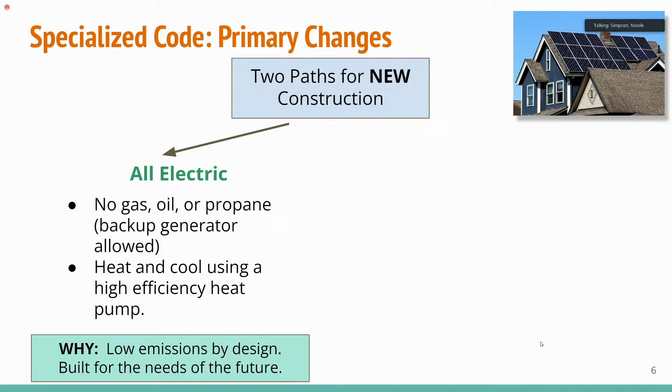But the most important thing is the heating and cooling with a high efficiency heat pump. We can talk more about heat pumps later if you have any questions about that. So why go this path? This means lower emissions by design. If you're all electric, it is inherently lower emissions. And it's building for the needs of the future, not aligned with the way things have been done in the past. So that's a valid option today, but the alternative is mixed fuel.

That's the terminology used for any kind of fossil fuel hookup into the building. There's two requirements that will come with that for a specialized code. Pre-wiring for future electrification. That means air and water heating, cooking, and clothes drying. If you're using gas for that, then you would need the wiring in place to be able to easily switch that to electric when any of those systems fail and you replace it. It makes it easier for that future building owner to make that choice to switch to electric. And you think about where we'll be 10, 15, 20 years from now when they'd be making that choice, it's going to be much more common and the obvious choice at that point.

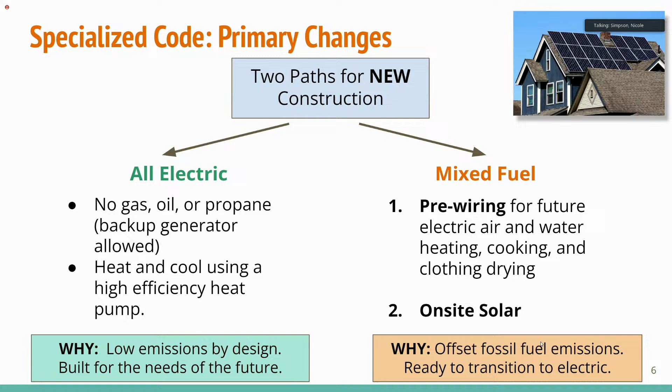So pre-wiring, while your building is being constructed, it's open, you're doing the electricity anyway, it's putting these wires in place while you're designing that electric panel and building the house. It's going to be much more cost effective at that time. The second thing is on-site solar. A certain amount of solar would be required in any building that is doing the mixed fuel option. So why do this? It's offsetting those fossil fuel emissions that would be coming from that building by doing the solar. And it prepares it to be easier to transition to electric down the road using that pre-wiring.

So let's start with a single family home that's less than 4,000 square feet. If you go all electric, no changes to the code, you can follow what's in the stretch code. If fossil fuels are used, you need to pre-wire for those electric appliances in those categories I mentioned before, and you would need a minimum of 4 kilowatts of solar on site. It does allow exceptions for shaded sites. So if there's trees that are causing shading on the roof, there's certain criteria around roof angle, direction, and if it doesn't make sense to put solar on that building, it's not going to be forced. So you have those exceptions, but the expectation is 4 kilowatts of solar if you're using fossil fuels.

For context, if you look back at the last 15 years, 91% of construction, 91% of the buildings built in Hopkinton were single-family homes less than 4,000 square feet. That doesn't necessarily tell you what it's going to be in the future, but it gives you some idea that this is the largest group of the building categories we're talking about here.

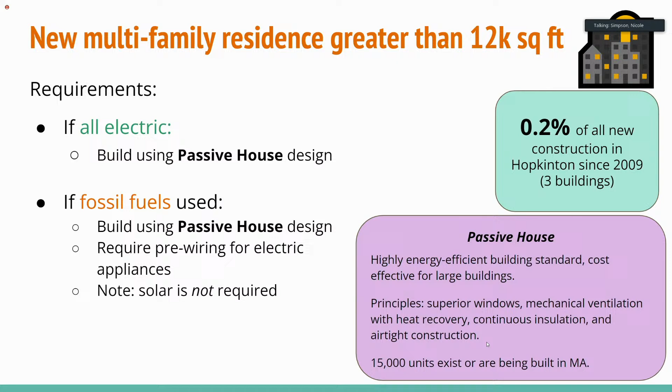And finally, commercial construction, that represented 3% of buildings. No code changes for all electric. We'll note that Elmwood School replacement is planned to be all electric in its design, so it complies with the code from the onset here.

If you're using fossil fuels, pre-wiring for electric appliances - this is still for air and water heating, cooking, and clothing drying. It doesn't apply to other industrial uses. So if you were using the building for manufacturing and had fossil fuels for that system, that isn't part of the criteria. It's really about building operations.

There's requirements for solar. It's specified a little bit differently than the other types of buildings, but the way you can think of it is it represents about 25% of the roof if it's a 2-story commercial building. But it could be anywhere on the property - it could be on the roof, it could be covering the parking lot as a canopy, or another location on the property.

So that's commercial construction. I wanted to note, you may all be aware that Hopkinton was recently named Platinum BioReady. We pride ourselves in having biotech in Hopkinton and want to encourage more. I just wanted to note that there are 9 other municipalities that are Platinum status and have the specialized code. So having this code and adopting this code is not going to change our BioReady status. Those are compatible with each other, and you can see examples of that in other locations in the state.

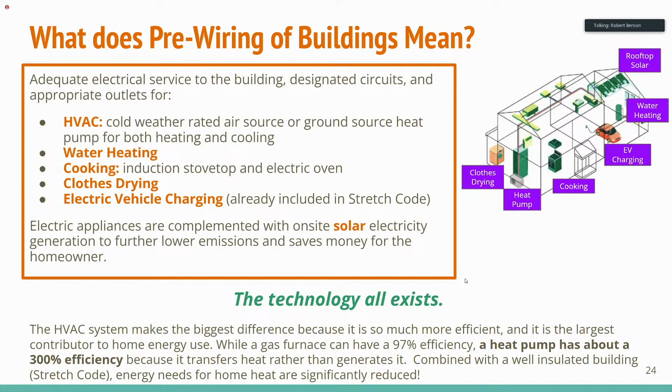Gary, this is Rob through the chair. Could I ask a question? I'm trying to understand the context, maybe I feel like I missed something. Is this stretch energy code an article on the annual town meeting? I guess I don't know what I don't know here. So I guess whose purview is it, the Green Committee's, to add this? Is it in the building code? Where does this kind of regulation fall in the town government?

It's a good question. John, can you enlighten us as to which board or committee officially has purview over energy codes such as this? It's part of the building code, and a change to the building code needs to be voted upon at town meeting. Usually building codes are part of the general bylaws, but in Hopkinton I don't exactly know how it works—I think they reference the building code in the bylaws. There's some connection. So in order for this to be accepted, it has to get approved at town meeting, and then it becomes part of the building code that Hopkinton operates under.

So Rob, what I can say is that does not fall within the jurisdiction of the planning board. So the session today is strictly informational for us. And I think one of the asks of the Sustainable Green Committee is that we take a vote in support, or that we vote to see if we are in support of it, although it's worth noting that's a non-binding vote in any way.

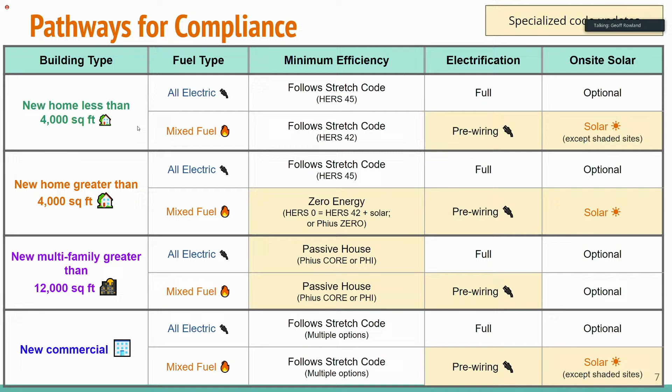Nicole, if you could actually go to slide 25 in the supplementary, please. I think that would help highlight it.

Okay, thanks Geoff. My last comment—I'm glad there's some additional incentive for larger houses. I know the specialized code isn't one you guys developed, but I personally wish there was more incentive to build small homes instead of large homes. Just my personal opinion.

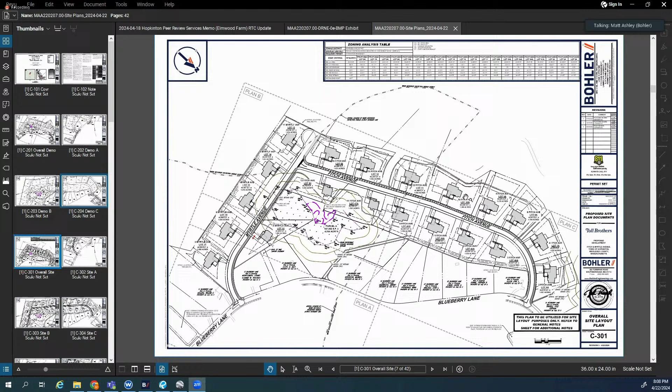One of the items that Bobby and I have been working on is groundwater recharge on this development, trying to do the max extent practicable on site. So what we did here is introduce stormwater chambers on each of the individual lots. Let me see if I can get a better picture here. There we go. So you can see these chambers on these lots, and the idea is to collect clean runoff from the proposed roofs and recharge that back into the ground.

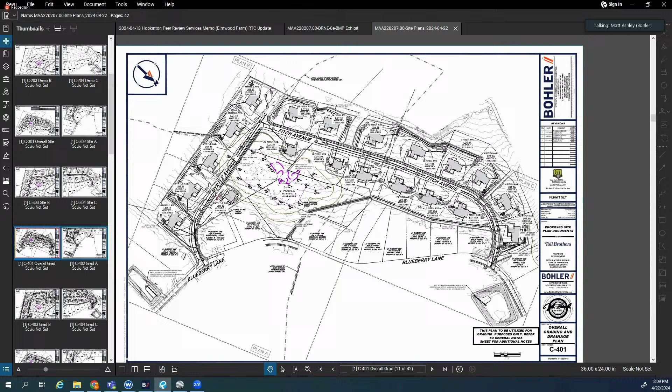The other way we're getting volume, not recharge, but to clean the water, is the water quality units down here by the intersections, and then ultimately into the detention basins, which we're proposing to improve and get back up to where they were when they were initially proposed.

With that being said, we're not quite meeting the recharge calculations, but that's due to the existing conditions on the site. Not a lot of great opportunities due to the type of soil out here, largely a C and D type soil, which isn't great to promote infiltration. But we incorporated it everywhere we could, and Toll did test pits on all these different lots, so we have a good idea of where we'd be able to infiltrate or not.

The last item we wanted to bring up is maintenance. It's a little unique as this is a lot subdivision, so just making sure where everything is and who's ultimately going to be responsible for these different areas. We put together a quick little exhibit here for a visual.

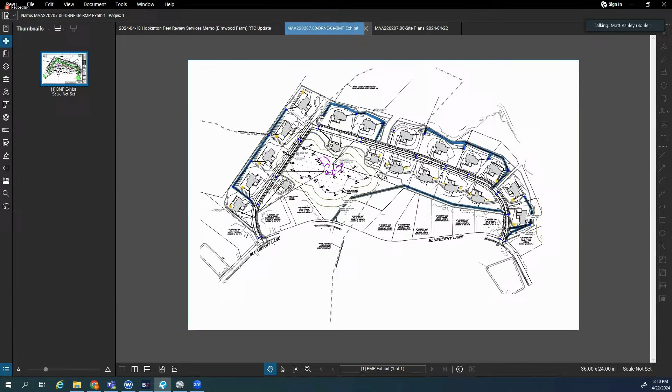The blue represents the yard drains and French drain systems, which would go under an easement plan and be maintained by the homeowners association. Everything in green would be the roadways and the existing basins, which doesn't change from the condition today, and that would be maintained by the town. The last one is the orange, which are all these little subsurface systems, maintained by the individual homeowner.

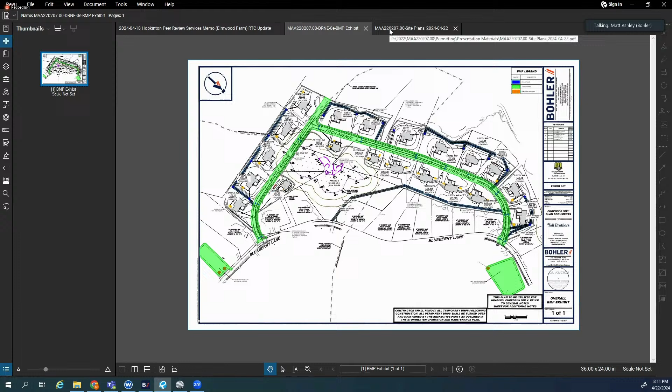So that's a quick recap of everything that's going on and the improvements that have been made here. Happy to answer any questions anyone has, or Ted, if I missed anything you wanted to bring up.

Nothing for me. I think it'd probably be good to have Bobby go over his review.

Yes, thanks, Ted. I was just going to ask, Bob—I think, as we've often said, we rely a lot on you and your professional guidance here, as none of us are professional engineers. So if you'd be willing to share your most recent review and letter, my ask is just to highlight the major discrepancies you've identified and have been addressed.

And if there's anything specific that is not yet closed out with the applicant, then we can get some measure as to what's left to do, and potentially if we need to make a decision on it, then we can do so.

Sure. Thank you. Can you hear me? Yep, I can hear you. Good. So yeah, we went through about 3 iterations of comment resolution letters with the applicant and met on several occasions. The resolution letter is about 11 pages long, with 24 major comments that we feel were addressed. There's still 2 items that we want to bring to the board's attention.

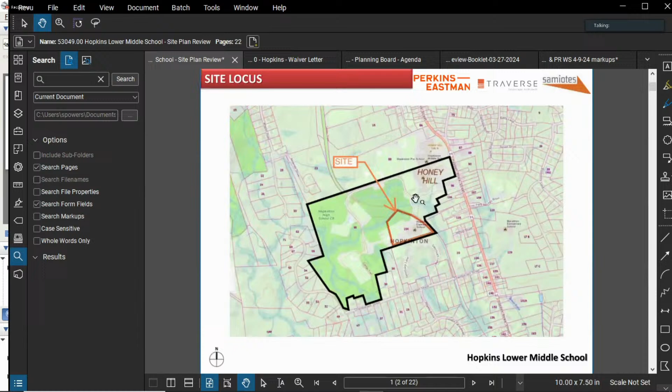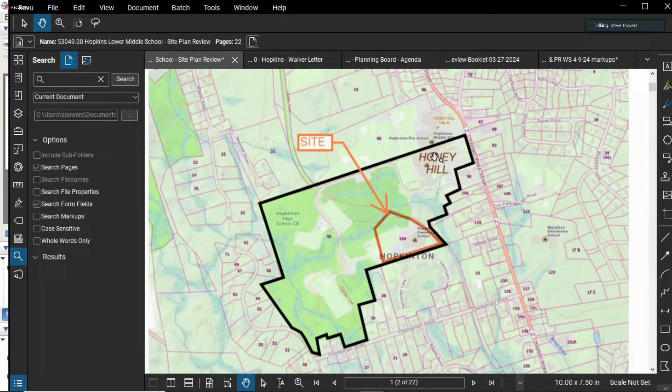We have circulation that comes from the north down into the site for the existing school, and then a loop road that continues out around back up to the north and around back out to the main route that connects to Hayden Row or Route 85 that is shared with the high school. Here's a site locus just to orient everyone. Again, main route coming into the site off of Hayden Row. The Hopkinton Middle School is in this area. The Hopkinton Elementary School is right down in this area. And again, Loop Road continues through all the way out.

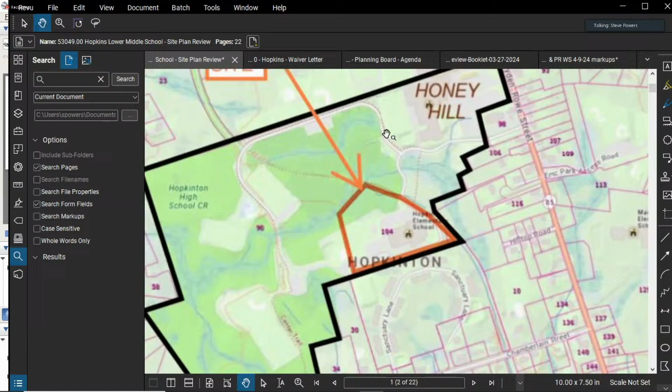This is the existing conditions plan. It was done by BSC Group, the surveyor for the project. Just to zoom in a little bit, just to give an idea of where everything is.

The project school was built and constructed in the late 90s. It was approved through the Hopkinton town boards. The main school building is located here, as I previously mentioned. The connecting road up to the shared Hopkinton High School middle school road is up to the north.

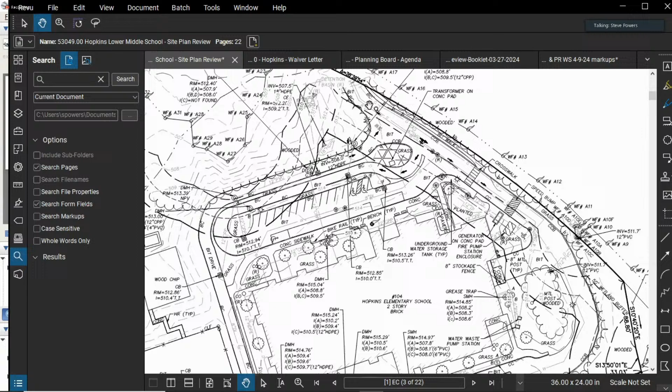Currently, we do have traffic that comes through. It's parent drop off in the rear of the project, comes through, as you can see with the directional arrows, through this way, and then back out. Parking is located. Some parking is located to the rear, and this is essentially where the current parent drop off is.

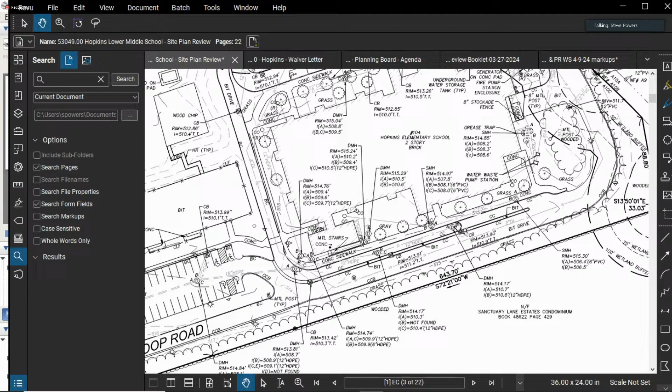Current bus drop off continues down southeast, and then comes to the front of the school drop off before it heads out. The major parking for the area and for the school is located in the southwest corner.

So with the proposed development, what we've looked to do is maintain the existing developed area and reconfigure it to, one, put the addition on that Chris mentioned earlier, and also to preserve the outdoor activity space. Ashley will go through some playground areas, some additional hardscape and fields later.

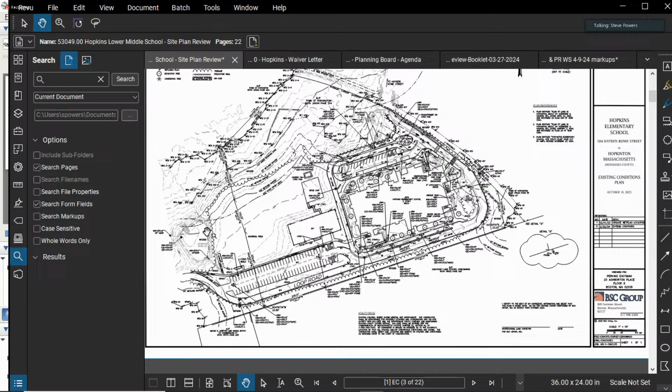Couple things I do want to mention: we do have an existing stormwater management system on the property. This was again done and approved back in the late 90s by the original design engineer. There's a stormwater basin in this area to the north, as well as to this area to the west. We are looking to continue to use these two areas.

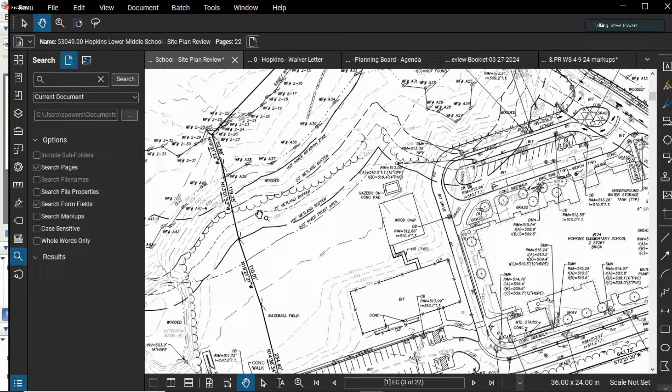Additionally, I do want to mention, you can see a number of wetland flags to the north and west of the project. We currently have a notice of intent on file with the Conservation Commission. We had our first meeting last week. And we are looking to limit development and any kind of impacts to the wetland resource areas and associated buffer zones.

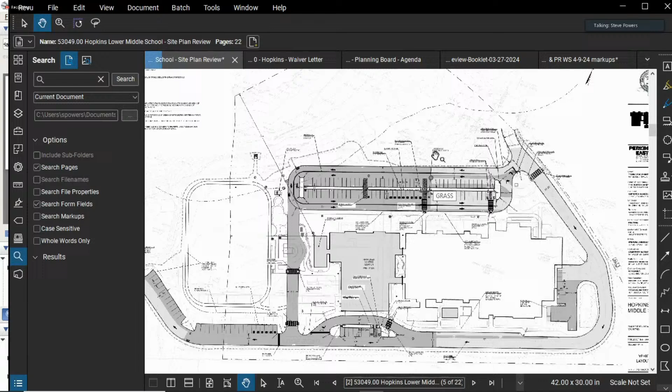So just to start to the rear or north of the school, we are expanding the proposed parent drop-off and queuing areas to the rear. We're adding additional parking. As you can see, the original parking ends right about in this area here. We're looking to expand that parking and expand the queuing lanes all the way to the west to circle around for parent drop-off, to contain more of parent drop-off into the site and not onto the main loop road.

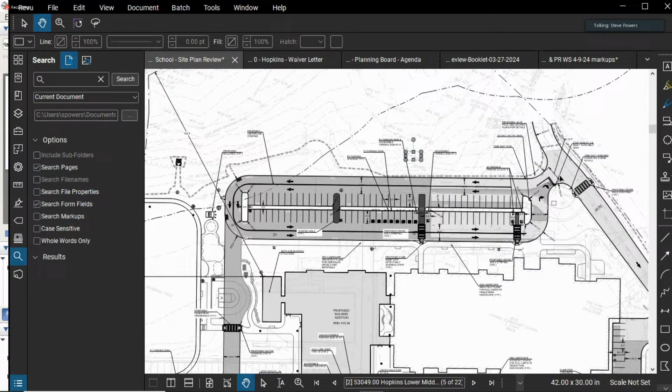Traffic will continue to be one way coming out and then down to the south and east. Similarly, we're trying to keep similar bus queuing, bus routes through the front of the property. Again, buses will queue through this area here, drop off, the main drop off at the front of the school, and then continue out. We are maintaining this access road to the west of the building.

This is strictly for emergency purposes. For the most part, it'll be a dual use of emergency purposes if emergency fire or services need to access this area of the school. We do want to provide full access around the school, but for the most part, we are trying to also use this as outdoor space. Again, trying to make this area of redevelopment contained to the existing area that's currently being used, the existing limits of disturbance, and make it more efficient.

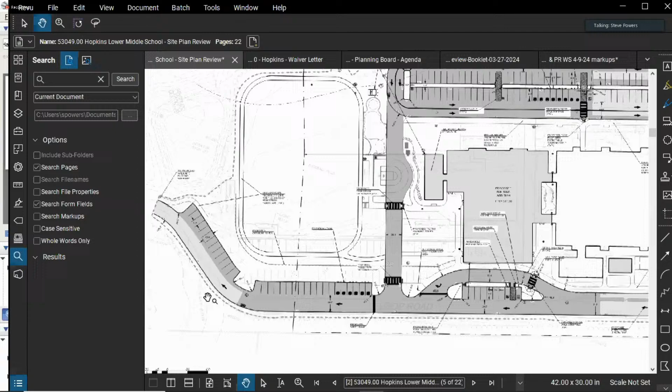Again, we're adding additional parking here along the road, all the way up, and then continuing on up into the northeast, ending here. We do have ADA parking both in the rear that we're proposing in these areas, as well as the front of the building. And we are proposing 14 electric vehicle charging spaces with dual chargers for each of those spaces here, and then to the south and west.

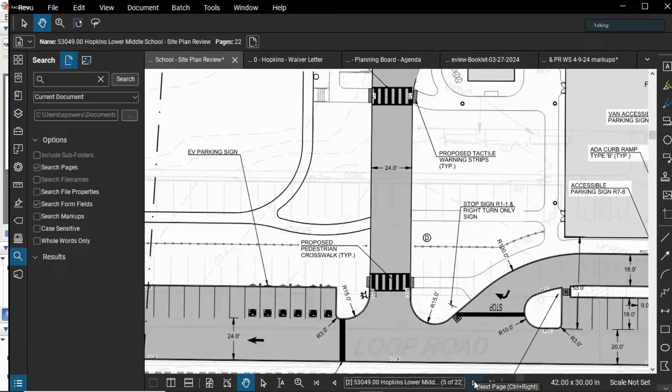Grading will remain relatively the same. There's no substantial changes in grading. We are reconfiguring it a little bit to accommodate the athletic field and to push the grades a little bit further to the north and west to accommodate the proposed building addition.

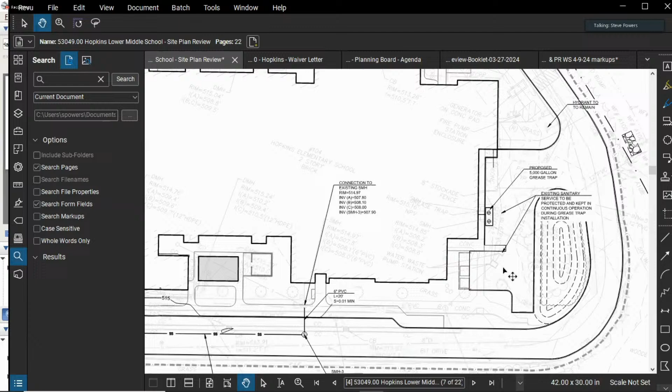Utilities, again, remaining relatively the same. As far as routing goes, we are extending water around the edges of the building just to make sure we're providing a full loop all the way around the building, and then adding a couple additional fire hydrants for the expanded area. And then sanitary, we are expanding as well down to this area and essentially using the existing sanitary infrastructure. Currently, there is an existing pump station in this area here. We are looking to reuse it. And then there is some expansion of electrical services to the rear, again to serve the proposed building addition.

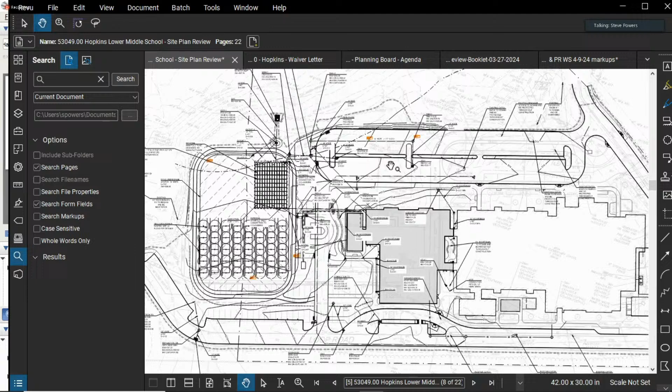So this is the stormwater plan. What we tried to do is use much of the existing stormwater infrastructure as possible, and for the new development and the increase of impervious area, which is just shy of an acre, we're looking to pick up roof leaders from the existing proposed building addition, and then add additional stormwater conveyance structure for the rear parking areas to pick up the additional runoff, route it through this new conveyance system, treat it.

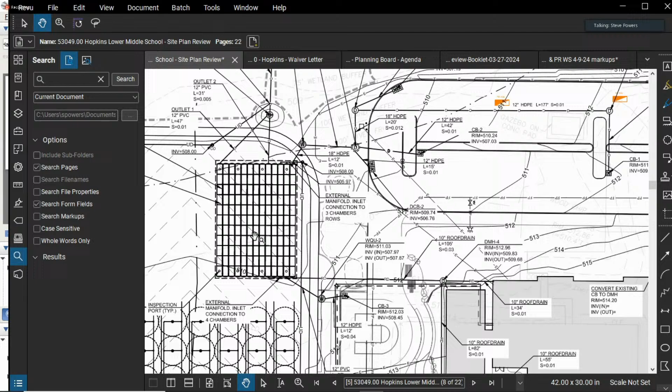Stormwater quality units, and then our larger recharge system is currently located in this area here. We're looking at a recharge system of right now arch chambers surrounded by stone. It's relatively common for underground systems. And the advantage of using this area here is we're able to accommodate the stormwater management requirements from the stormwater management policy for Massachusetts, as well as the town's stormwater bylaw, and then also reuse the space for athletic fields as well.

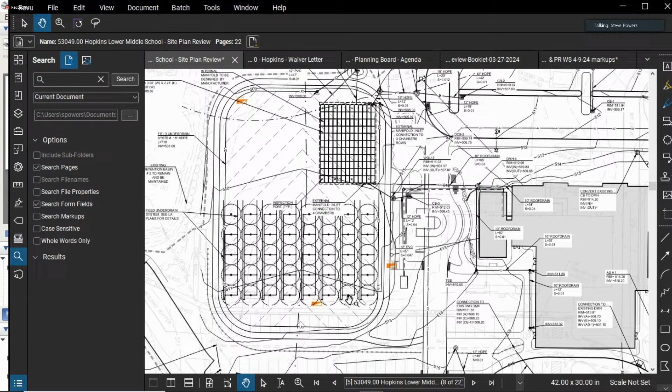This area here is currently a geothermal well location. I'm not an expert in geothermal wells, but we did do a test well, and we're looking to space these throughout the property in an efficient way as part of our sustainability actions throughout the project.

I can tell you, as part of the stormwater management design, we did go out and do a couple rounds of soil testing on site, as opposed to the previous project, which is east of Hayden Rowe. We did find a little bit better material and a little bit lower groundwater. So we are looking to recharge fully the existing increase in the development in the impervious area.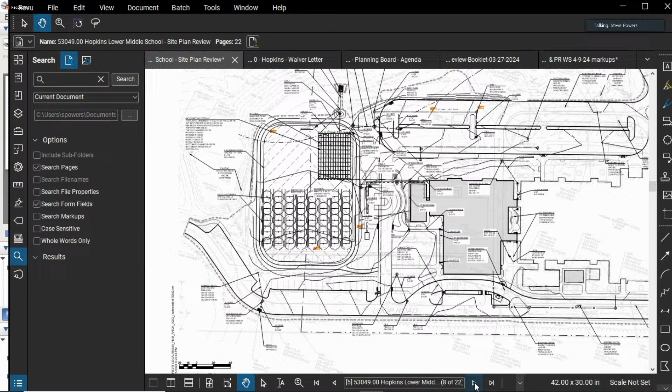So with that, I can turn it over to Ashley for the landscaping portion of it, but I'm happy to answer any questions in the meantime, or we can certainly save them to the end and answer them all at once.

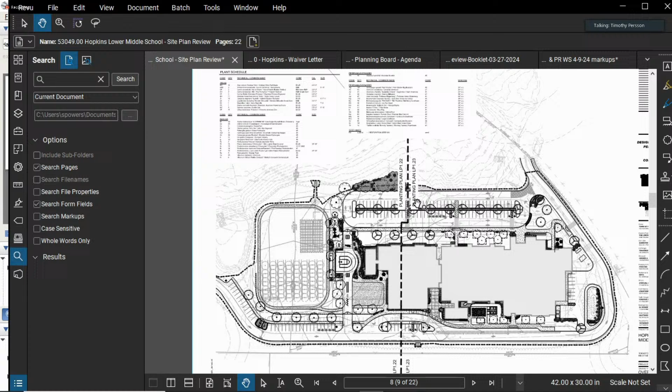Steve, I'm just going to make a few corrections. So what Steve was referring to as the back of the building is the front of the building. And the back, where the parent drop off is, the back of the building is where the kids drop off. Just not a bad mistake, Steve, just so people's orientation is correct.

A couple other quick things was, I believe the building was designed for 600 students, and we currently have 688 students in the building, not 668. I only make that correction to let you guys know that 20 kids is essentially the size of another classroom that we're using. So it feels like a small number, but it does make a difference. So just those quick corrections, but keep going, Steve.

You're doing great. Can I just, it was designed for 600 and now what number is it at? It's at 688. And with the proposed addition, what is the combined school designed for in student population? We're trying to get to 802. And we just picked up 20 kids, so it's growing.

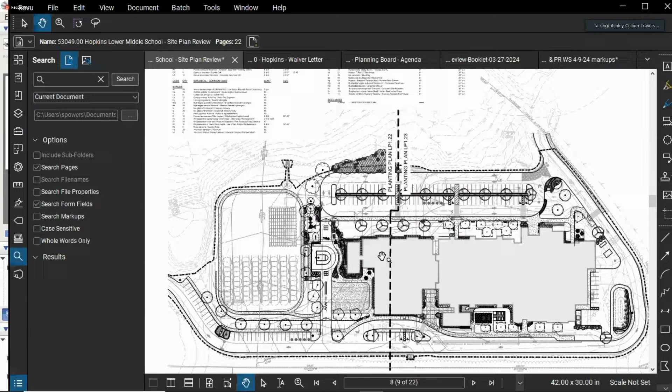As part of the improved circulation and increased parking, we also have some new amenities on site in terms of outdoor play areas, outdoor classrooms, and outdoor spaces dedicated to PE. We've had quite a few programming meetings with the school, and one of the big things we found out is that recess and play can happen, and PE can actually happen at the same time. So we really need to provide two spaces for those uses so that they don't interfere with each other.

Some of the nice features of this plan you see in front of you: there's more of a recess zone with a new playground with age-appropriate play and climbers, things with a little bit more difficulty. You'll see that right to the left of the emergency drive. It also includes a half basketball hoop right down below that. You have these really strategic amphitheater seats—low seat walls built into the grade at that backside of the module—that offer an outdoor classroom opportunity and seating for anything happening there.

We're also taking full advantage of that emergency drive when it's closed off during the day for use with hardscape games, so that's a really great spot to have those. The PE zones are to the right of the emergency drive between the outdoor classroom. PE really needed an outdoor hardscape area. This could be used as very flexible space, anything from pickleball to outdoor games to any sort of training could take place there. That's the reason you see that in that area.

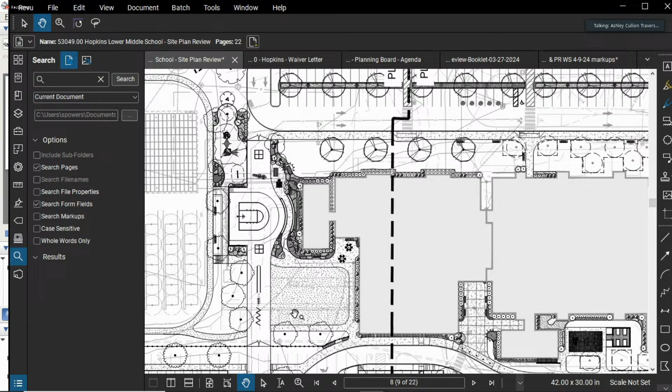Previously on the site there was a ball field. Within those program meetings, we realized that was not critical for the program of the school currently. However, a multi-use field would be much more applicable and usable, so that's what you're seeing there. And around that, you have a walking loop—I won't call it an actual track, but it is an asphalt paved loop that can be used for PE and even recess, but very flexible space and usable for many different groups.

What he was mentioning previously was on some of these schemes, you'll note some striations or markings shown in this lawn area of the field. We did initially anticipate we might have some sort of subsurface drainage for that field when we intended there to be irrigation. Currently, there's no irrigation planned on those fields, so if you see those stripes, that was for an older drainage system that will not be installed.

Before we move on, Steve, if you don't mind jumping forward, I think we can move to a bit of a blow-up of the scheme. In terms of security, there's fencing provided around the southern portion of the field and around the back. It doesn't need to loop the entire area, but we're really just creating a barrier between any sort of athletic activity happening on that field and our parking movements. And again, like Steve noticed, the emergency access drive will be gated as well.

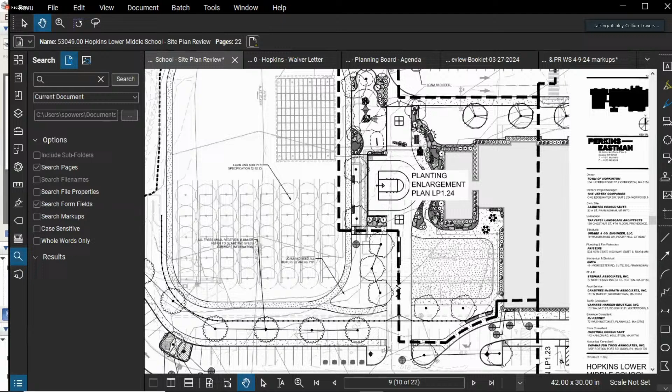This gives you a little bit of a blow-up of that outdoor playground space up in the top of this image. Outdoor classroom space has also been provided. There are two locations: one towards the rear of the school where Steve has his cursor now, a new outdoor vegetable garden. Vegetable gardens are currently happening on site; we're taking this moment to revisit that, doing it in a little bit of a different way where there's actually seating next to it too, so we can take full advantage of that space as an outdoor classroom.

New outdoor plaza spaces servicing both entries for parents and bus drop-offs, with outdoor seating, and looking at incorporating shade in all those areas with outdoor trees. Around the site you'll see quite a bit of planting. We're really focusing on maintaining some of those existing trees, which you'll see at the top of the page, located along the existing parent drop-off. Those will all remain, and we're adding on to that with new shade trees being located in the parking lot areas, along the sidewalks, and around the entire school.

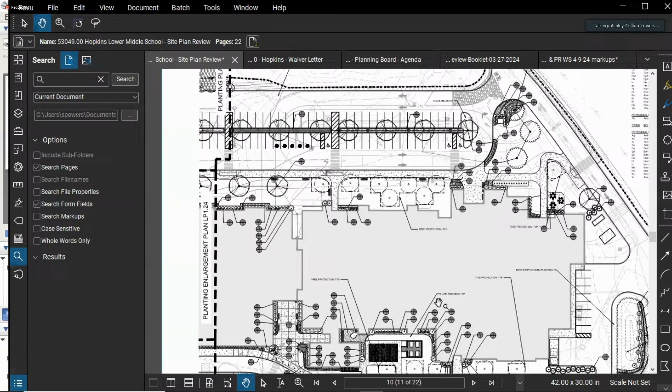Also focusing on new foundation plantings and increasing some of the restoration plantings in the disturbed areas. This is specifically located in the one space where we have the new parking lot infringing in a buffer zone, so we've been working with Conservation Commission to look at those plantings and make some revisions based on their comments. That area is proposed to be renovated with new native plantings and species. And across the site, just amenities, benches, new bike racks, and a really new overall appearance with a lot of great added pieces to the school.

So there is a bioretention area, I think Steve noted that, right over there on the page. We are increasing the planting in that area, so any disturbed areas around that perimeter will be revegetated with new native habitat.

This is just another blow up of that playground space where you see the PE zone, which is an asphalt hardscape flex space, an outdoor classroom with outdoor seating. And then you have your recess area with the basketball hoops, amphitheater seating, and outdoor play.

Our electrical engineer is not with us today, but there will be new site lighting around the school in terms of pole lights and safety lighting. To the east of the school, where there's been no modifications, pole lights will stay in place. However, the rest of the parking areas will receive new pole lights, both double and single fixtures. There was a photometric included within your package, and all those lights will be dark sky compliant with no overflow onto adjacent properties.

Again, happy to take any questions or comments now, or we could keep going and take them at the end.

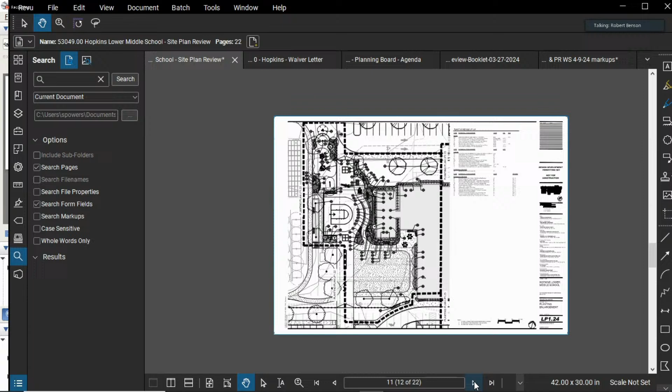Why don't I open up to the planning board? Are there any questions now, or can you ask at the end? If there are any currently, I know I have some, but I was going to save them for the end. Up to you guys. I'm good. Save for the end. All right, why don't we keep going, and we'll ask any questions we have at the end of the presentation. Okay.

So the next thing we included were exterior elevations. Dan, I didn't know if you wanted me to, there's a couple sheets that I left in here for you. Yeah, that's fine, I could speak to these.

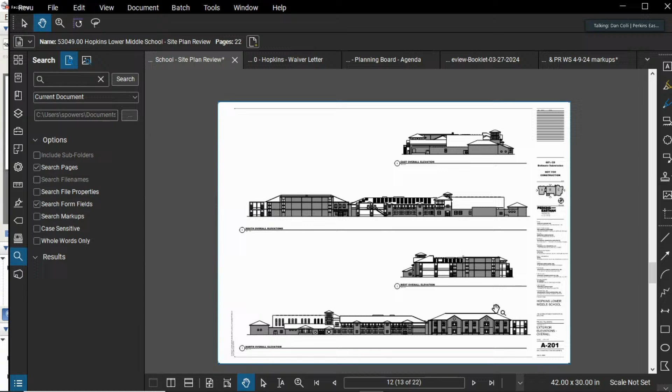For the exterior elevations, we are looking to not directly mimic the Hopkins building, which as many of you have probably seen has a lot of brick patterning and different colors on it. What Steve is showing here, zoomed in, is the gymnasium elevation, which is the south side where the student bus drop-off is. You can see the tiny little letters on the canopy that say Hopkins Lower Middle School, the gym mass, and then behind it in the background, the pitched roof of the classroom side of the addition.

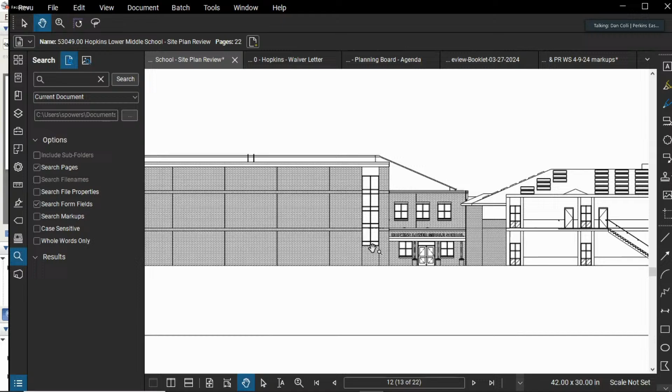So if you go down to the addition, finally up that elevation there, the idea is to again not directly mimic, because we want less glazing in the addition. We don't need as much, and one of the things we strive for now from a sustainability standpoint is to maximize daylight and minimize the amount of glass. So that's reflected here, and we're going to pull in some of those brick colors to try to not mimic the building, but create a kind of harmony with the existing building as best we can. Again, the pitched roof is there to harken back to the existing building, but not create just a carbon copy, rather an addition that pays homage to it but has its own identity.

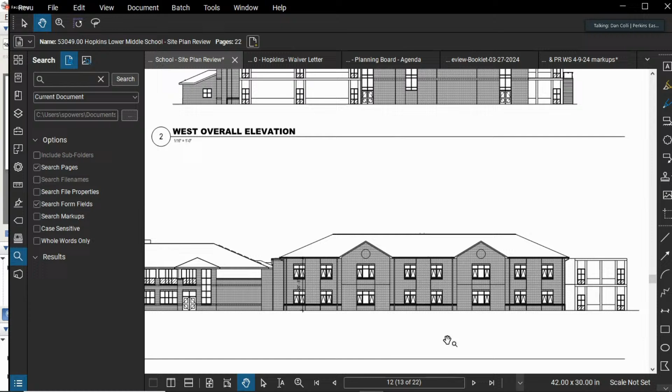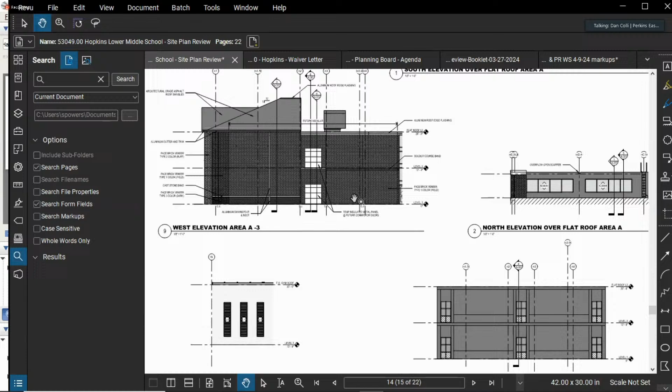Okay, these are close-up elevations, showing the west end elevation modular. Those modulars are coming over from the Elmwood, where they're currently stationed. They were designed to look like the modulars at the Hopkins, because the intention was for those modulars to eventually make their way over to Hopkins. So once Elmwood, or Charleswood, opens, the intention would be to bring those modulars over and snap them onto the end of the classroom addition, giving four more classrooms to the Hopkins building.

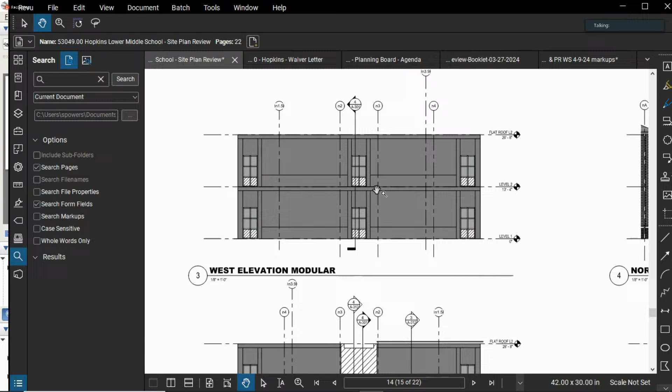So with this, we did. Oh, go ahead, Chris. So I'll take this part.

As I mentioned, the town has engaged with Commodore Builders to develop logistics plans and serve as the construction manager throughout construction. They've developed a traffic plan that would first and foremost prohibit deliveries during drop-off and pickup times to mitigate traffic. The deliveries would be instructed to get off at the 85 exit of 495 and come up towards Hopkinton from the south.

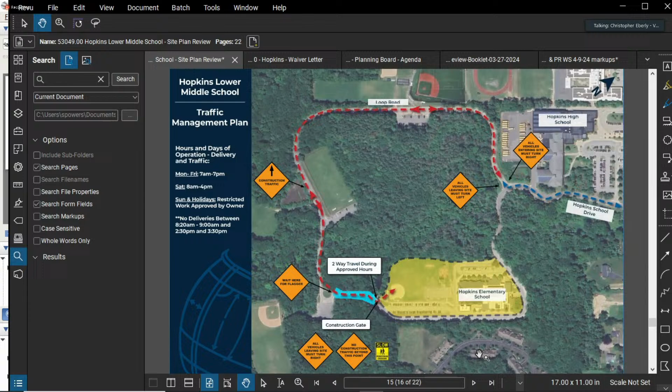They would turn into Hopkins School Drive, and rather than pass by the school, they would utilize the loop road that is two-way traffic all the way to the lot on your bottom left there. They would communicate with the site to have managed traffic during the one-way portion shown in blue, to ensure that any traffic coming around the school is not in conflict with the deliveries. We think this is an efficient way to get construction traffic in and out of the site without having to visit heavily student-frequented areas.

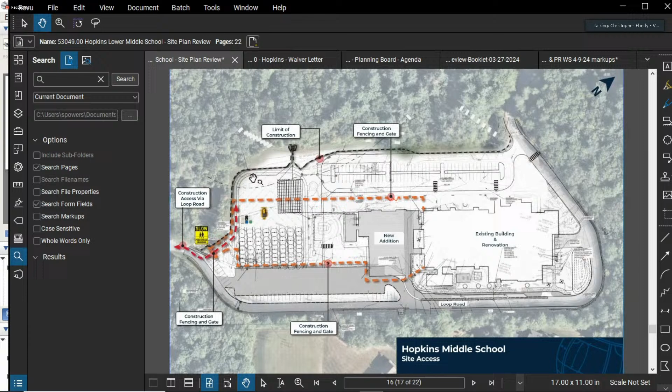The construction schedule is offset from the Charleswood project by 1 year. Pending a successful vote, we'd begin some site improvements at the beginning of July, largely to create the asphalt that makes up the parking at the top, so that it can serve as two-thirds parking as we take over a portion of the site for the construction fence, and also so that one-third of it can serve as a flat play area managed during winter with snow removal, leaving a remaining grassed area for students to use for recess.

Construction will start in earnest in September, October. They'll mobilize for the site and create that Jersey barrier and pavement area to extend the parking, but it will largely remain like this until the end of the school year. This will allow them to make headway building the addition and constructing the geothermal wells, while still operating as a fully occupied school for the entire year. You can see certain modifications we're making at the parking, with the goal that we would never reduce the existing parking available on site.

If you go to the next slide. As we move into the second phase, from the summer of 2025 until February of 2026, this is when we'll be completing the addition so it'll be ready for occupancy. We'll be developing site work close to the building, as well as continuing during the summer some site work at the entrance and wrapping around the fence that will make up the parking that becomes available to staff in February of 2026.

In February 2026, we'll get a temporary certificate of occupancy for the addition, and that will allow the current multi-purpose space planned as the extra half gym to be utilized as a temporary cafeteria while we do extensive renovations in the current gym and cafeteria, which will occur during the school year starting February 2026. If you flip to the next slide.

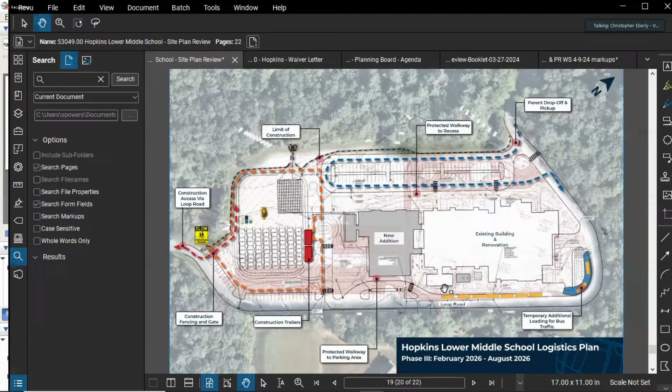So with that, we're happy to answer any questions that the board may have. Why don't we have our principal planner give a staff report first, and then we'll come back with questions. I know I have several. So, John, are you prepared to give a staff report?

Through the chair, there's not a ton to report on at this point. We are still looking to get the peer review inspector on. We've outreached to them; we just need some administrative stuff to happen. So they have not had a chance to review at this point, and I don't believe we've received any comments from other departments.

Otherwise, it's a major site plan due to the gross floor area and the addition of the parking. It is also a stormwater management permit since they are disturbing more than an acre of land. So those are the two permits that would need to be approved and the criteria that would need to be met. That's pretty much the extent of my comments at this point, but once we get comments from other departments and the peer review consultant, I may have more.

John, is it appropriate at this time to just note the waivers that we're requesting for the board? I don't think it would hurt.

So we are looking for 3 waivers for the site plan review and 2 waivers for the stormwater management permit. For the site plan review, we are looking for a waiver of administrative fees because it is a town's project, a school project. We are also looking for a waiver from the environmental impact assessment.

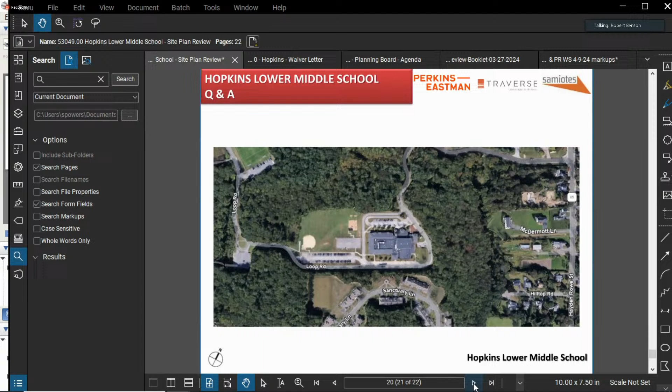So I think everybody has some general interest because it's a school and schools are obviously super important in the town of Hopkinton, and probably every town. So I have some general questions. It sounds like the new addition is going to have a gym, or maybe half of a gym. Is that correct? Do we have an interior plan in the deck, Steve?

We do not. I can probably bring one up if you want to start speaking. So as part of the programming effort, we used the MSBA guidelines as a rough outline in establishing the number of spaces that needed to be added to accommodate student growth. Chris, do you want me to share my plan? Yeah, if you have it available, Dan. Yeah, I do. Great.

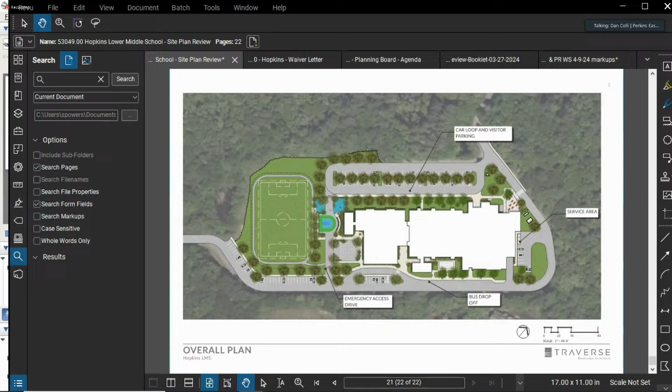Okay, everybody see that? Nope, not yet. No. Yep, yes, you got it?

So as you can see, to meet the programming needs, we need 3 separate gym spaces. A typical gymnasium will serve as 2 gym spaces. We have a multi-purpose room, which is a long, narrow, high ceiling space that would facilitate games other than basketball - running, tossing a ball back and forth, a transverse wall along the bottom of the space. That creates the temporary cafeteria space that would take over the cafeteria during the final construction.

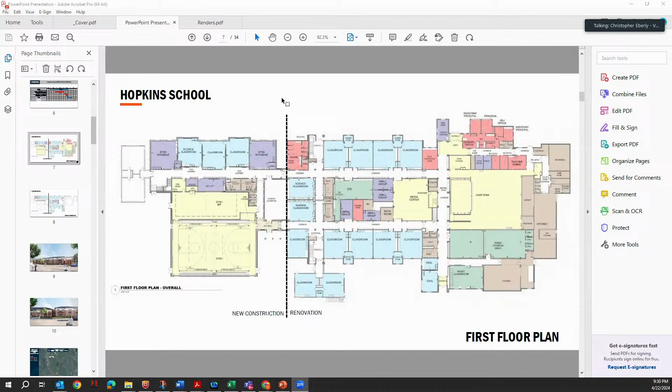We're adding 5 classrooms on each level, so that adds 10 classrooms as part of the addition itself. As part of this, we are transitioning from a 4-5 to a 5-6 school, so in order to have equity with what the current 6th grades have, we have upgraded certain spaces such as science classrooms to make sure we're providing appropriate curriculum spaces they currently have in the middle school. We are reconfiguring some of the spaces.

Anyone who has been to Hopkins in the last few years knows it's been sliced and diced quite a bit to accommodate the growth in students. There are several interior classrooms, so we're reconfiguring some of those interior areas to provide appropriate special ed spaces and other related spaces so we can restore the small group rooms appropriate for the number of students in the building. We're adding an STE space.

And then when you get to the right of the plan, which is the existing gym, we are turning the existing cafeteria into music spaces, and we'll be replacing the existing servery, which is actually quite small, with a servery that's 2.5 to 3 times the size. That will serve as converting the gym into a new cafetorium.

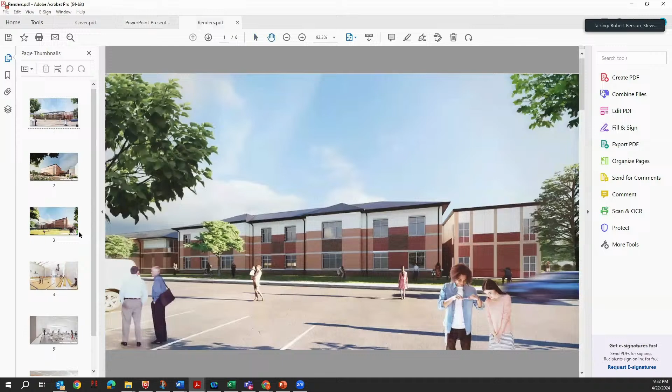So one of the things - I have boys in the school system, and one of the places I see all the time since Marathon School was built is their gymnasium. My boys play basketball, and there's lots of youth basketball played in that gym where parents come to watch. I'm envisioning this facility, this gymnasium, being the same, where parents are going to come to watch.

And Marathon School didn't allow enough space for really bleachers so people could watch. They set up a row of chairs, and I think it's an opportunity to make sure there's enough space on the sidelines for the hundreds of kids and parents that are part of that whole ecosystem within Hopkinton.

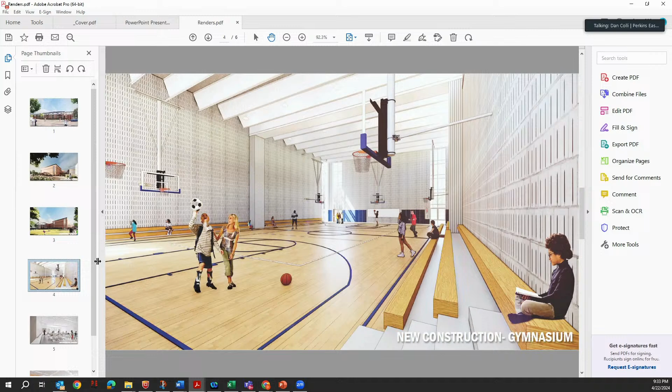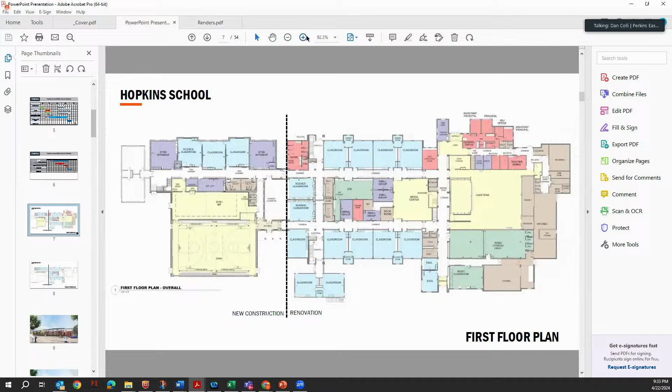So if I go back here, you'll see there are bleachers - sorry about that, I was trying to zoom in. There's bleachers on the top and bottom of it, so both sides, kind of a home and away. There'll be about 300 seats or so, basically matching what's in the existing Hopkins now from a count.

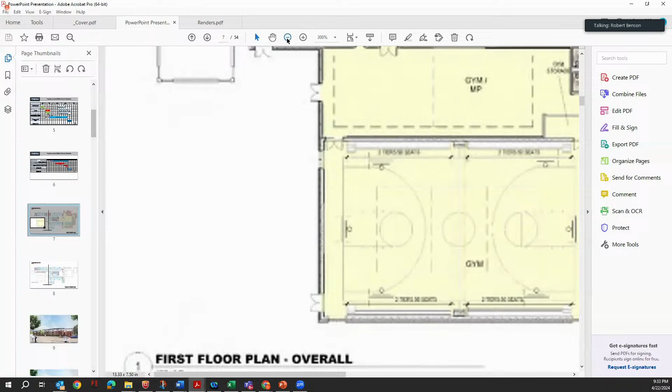All right, yeah, I just had one more comment, and then we're getting near our time allotment for this on our agenda, if we're not over already. But the outdoor spaces - I know Parks and Rec and Little League has used the baseball/softball field, and Parks and Rec has used that basketball court in the past for their programming. Has there been discussion with Little League or Parks and Rec or these other groups that have used those outdoor facilities? I guess I'm just seeing the size of the school increase and the size of the outside space decrease, and that just seems to not be in balance.

I would look to the schools to answer the engagement with various groups. We've had to take over some cleared lands. We are locked in by wetlands on multiple sides, so it's challenging immediately close to the school to create additional flat playland without deforesting the area that approaches the wetlands. We're landlocked by existing drainage structures to the north and east or west, wetlands on the east, and neighbors to the south. So there's a limited amount of available space.

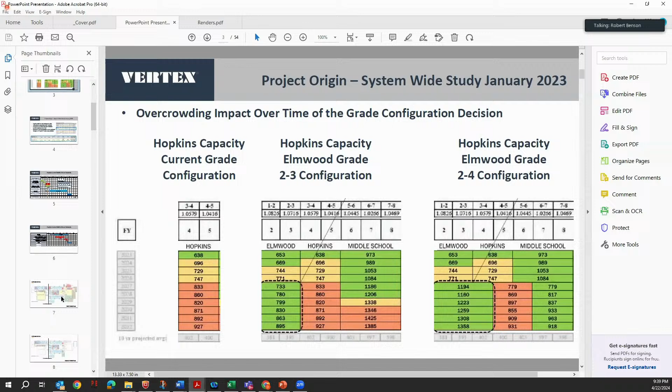You're already ahead of the numbers that were used to develop this. It just seems the projected ask doesn't match the real need, but maybe that's not for the planning board to weigh in on. Let me just continue to the next thing on our agenda, because it seems we're going to well surpass 800 students not long after this addition.

So typically we do a site walk. What does the planning board think about a proposed site walk for this site? I know I've seen it many times, but it might be worthwhile to get a sense of where the school boundaries will go, where the parking will go, and other things like that. I think it's a good idea. Typically we try to schedule these on a Saturday morning.

Is there somebody from the applicant that could meet us to answer some general questions, like this is the footprint envelope of the school, this is where the parking would go, so we could just see it.

Does the planning board look to have it physically staked? It doesn't need to be physically staked. If it is, great. If it's not, that's okay too. Just clarifying so we don't disappoint you or waste your time.

I think it would depend on what day it is, but we can arrange for someone. Like I said, we typically try to do these on Saturday. I know I'm not available. I don't necessarily need every member to be there, and it's hard to get all members available on one date and time.

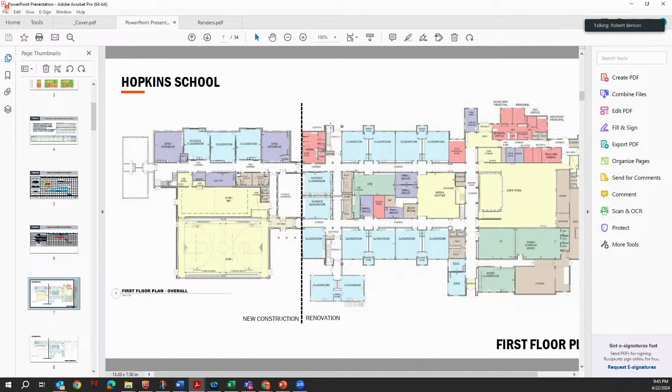And I think we also need to, do we need to do anything else, John? I think that's it. The decision for the stormwater management permit is required by May 26th, so we still have time. So we don't need to continue that, but that's about it.

Okay, John, could I ask you a general question? Do we need to complete the planning board process to apply for a building permit or just to begin construction? You don't have to complete the planning board process to apply for a building permit. They probably won't issue it. Okay, that's helpful.